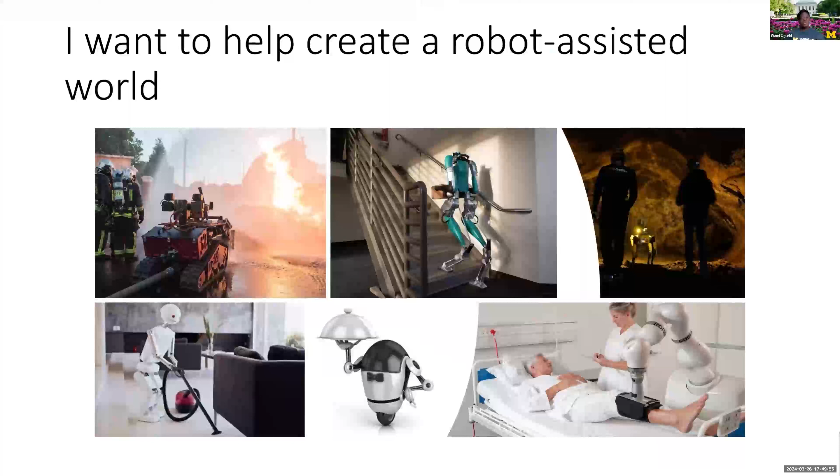But in order for robots to be useful in this human-centric world that's built by bipeds and for bipedal beings, they need to be able to navigate through common human terrain, such as stairs. So the objective of my work is to create a novel stair climbing control algorithm to allow for smooth navigation upstairs. That begs the question though, can't bipedal robots already walk upstairs?

Well, if we look into literature, we see that strides have certainly been made. So, for example, we're all probably familiar with Boston Dynamics and its Atlas robot that's able to navigate upstairs. However, I want to explore underactuated robots.

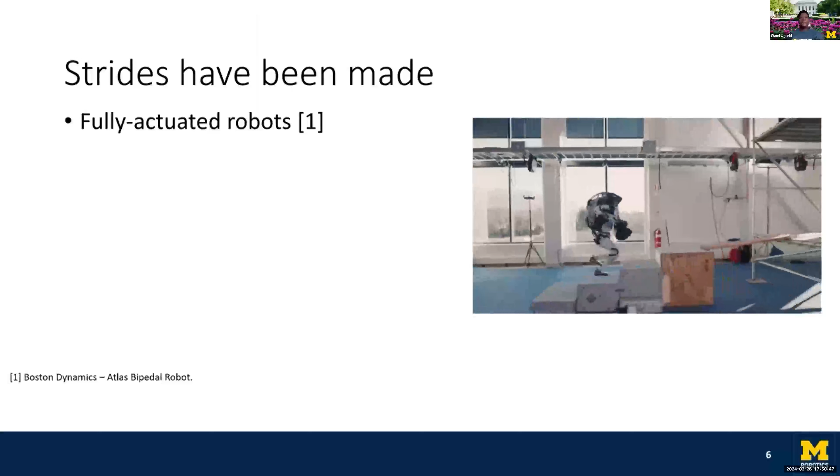Underactuated robots tend to be lighter and more agile. In this work right here, we have the authors use reinforcement learning in order to navigate up and down stairs using an underactuated robot. However, the algorithm treats the stairs as unseen perturbations, and thus quite a lot of torque is having to be exerted in order to make sure that the robot stays upright.

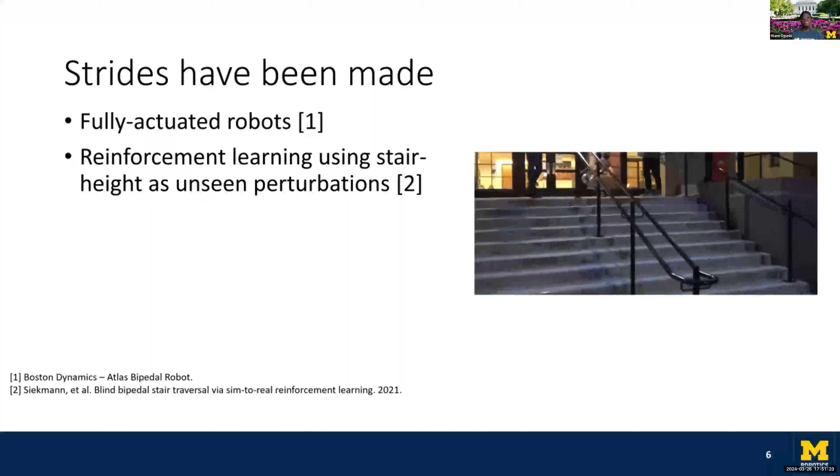You can imagine in delicate situations such as hospital settings, where this is probably not a comforting sight to see, a robot stomping up and down stairs in order to maintain balance. So I want to approach the stair climbing problem in a more gentler way.

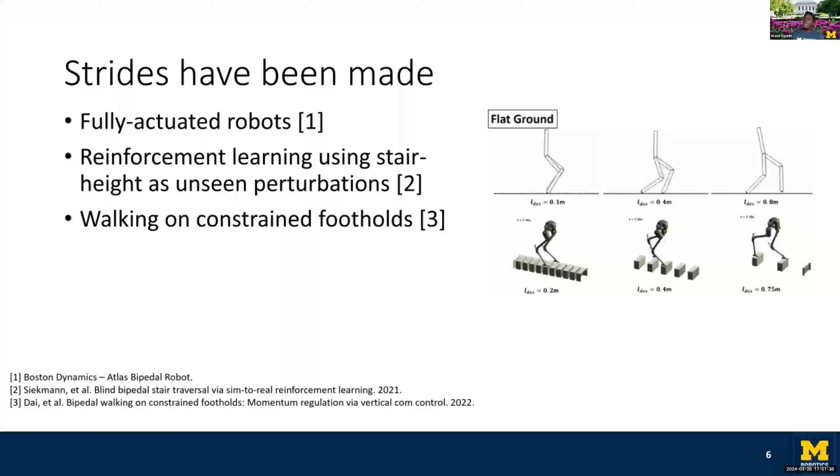And then more recently, this work has come out where the authors were able to get this underactuated robot to navigate on constrained footholds, including on stairs. They approach the stair climbing problem in a different manner than I do in this presentation, which I will be discussing shortly.

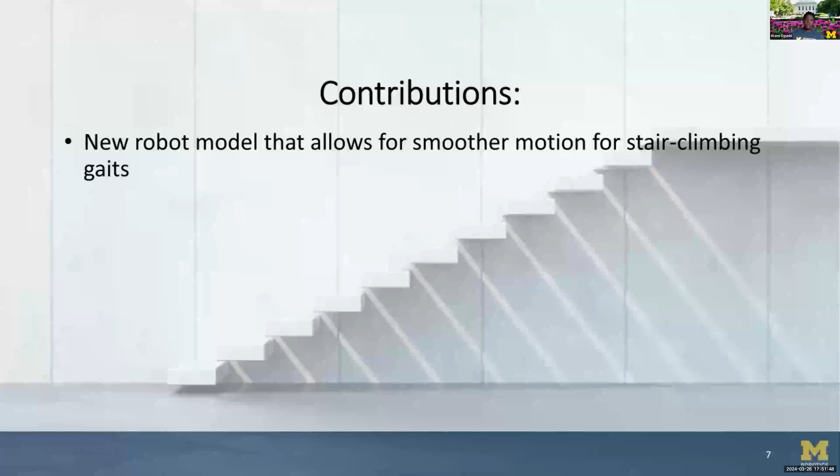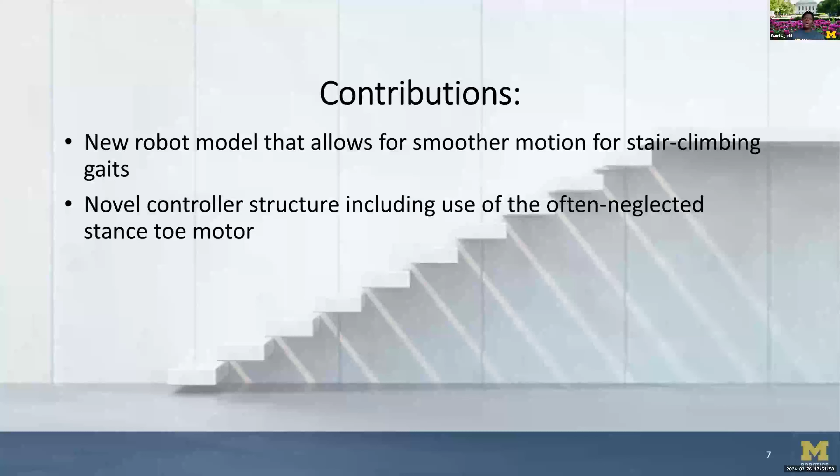So the contributions of my work are as follows. I developed this new robot model that allows for smooth navigation for stair climbing gaits. And I developed a novel control structure that includes the use of this often neglected stance toe motor.

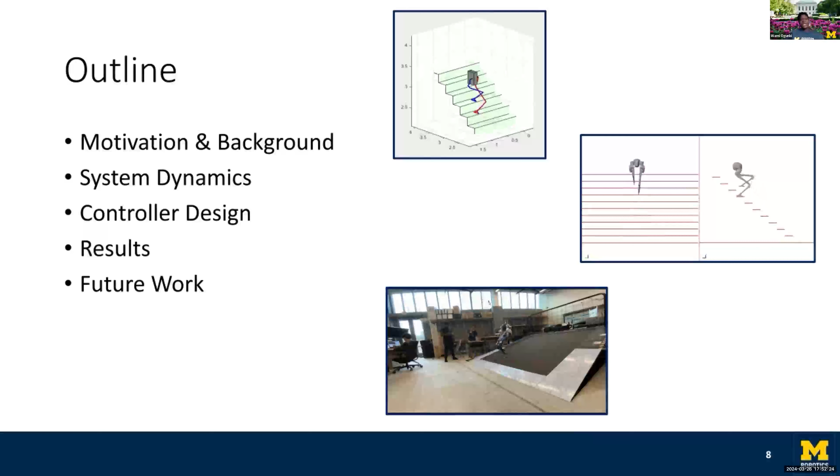So the rest of this presentation is outlined as follows. We already went through the motivation and background. Next, we will be discussing the system dynamics of the robot. We'll then talk about the controller design, as well as get into some results and end on future work.

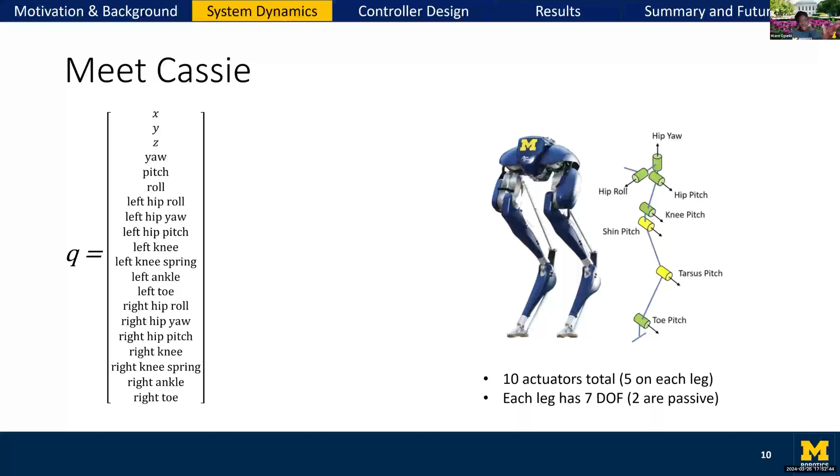So let's meet Cassie. Cassie is the robot that I apply my controller on. Cassie is an underactuated robot, so it has 10 actuators total, 5 on each leg, and each leg has 7 degrees of freedom, where 2 of these degrees of freedom are passive. This represents the generalized coordinate vector of the Cassie robot, where the first 6 coordinates correspond to the floating base coordinates, and these 4 joints correspond to the passive joints.

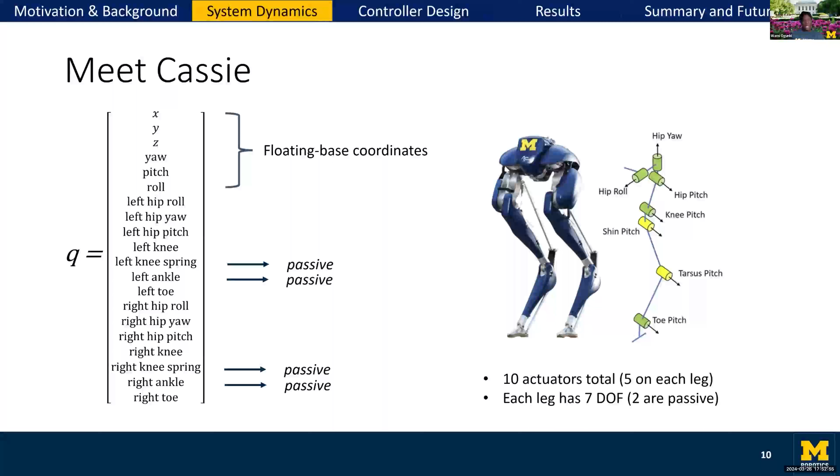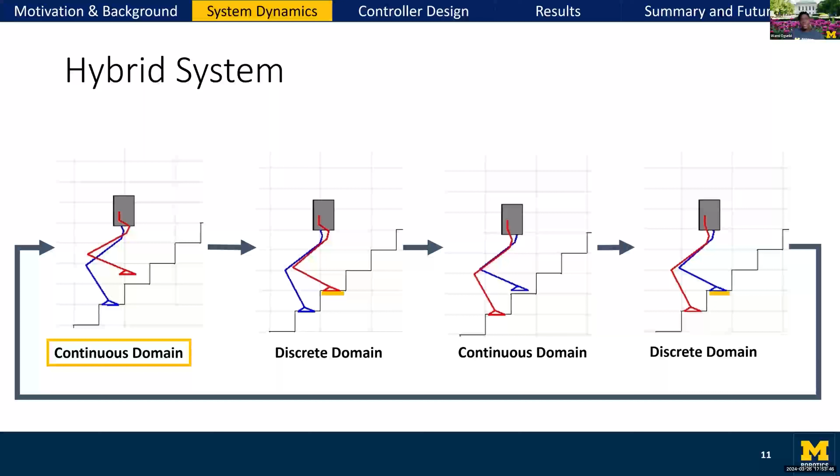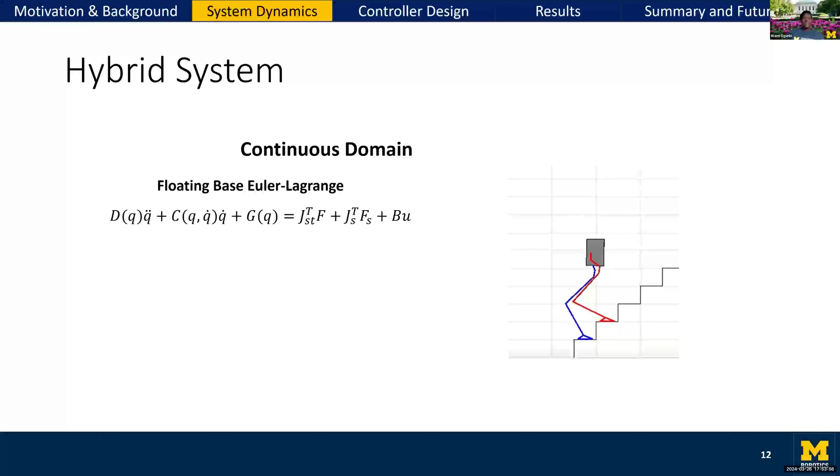We're going to look further into the continuous domain and see what the equations that govern this domain involve. So I used the floating base Euler-Lagrange approach to derive Cassie's robot equations, which we as roboticists are very familiar with this particular representation of the equations of motion.

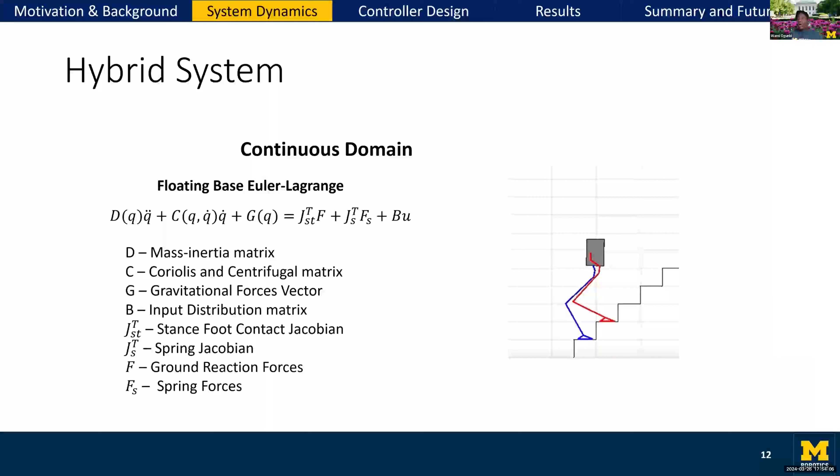But even if you are familiar with this, I don't want you to be fooled by how quote unquote simple this equation looks, because for robots as complicated as Cassie, these equations can be quite complicated. And I want to illustrate that to you.

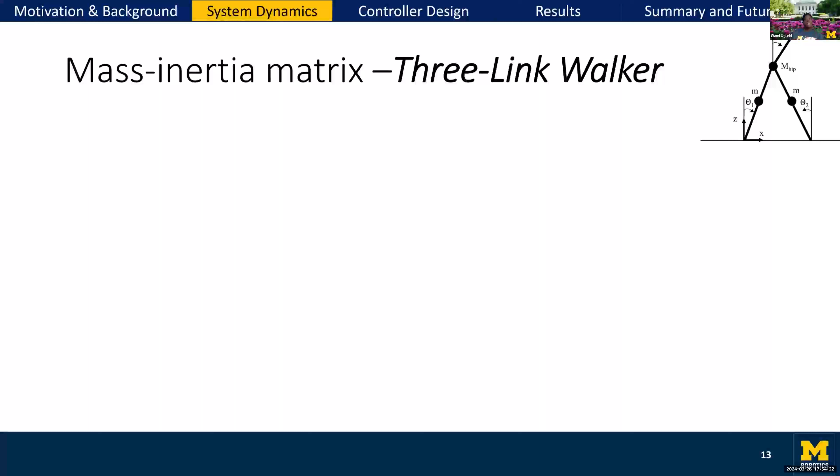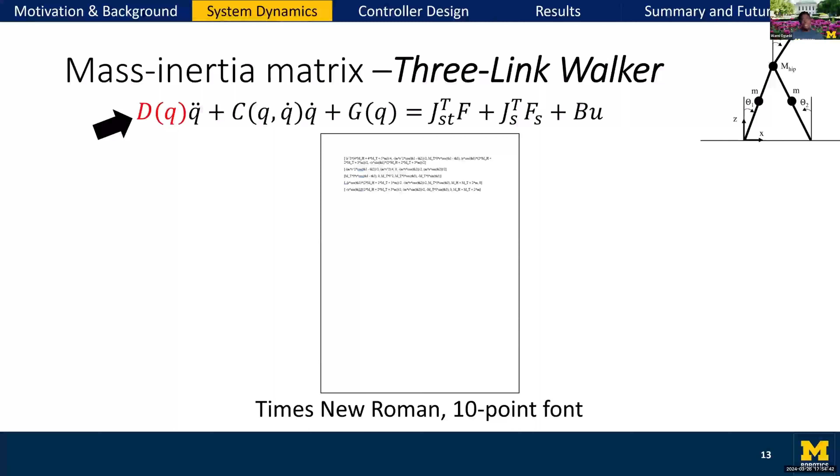So let's look at the mass inertia matrix, which is this D matrix right here, for a simple robot, the 3-link walker, pictured in the upper right-hand corner of your screen. If I were to write out the mass inertia matrix for this robot, it would look like this in Times New Roman 10-point font in Microsoft Word, which is not too bad. You could probably derive this by hand and it not be too bad.

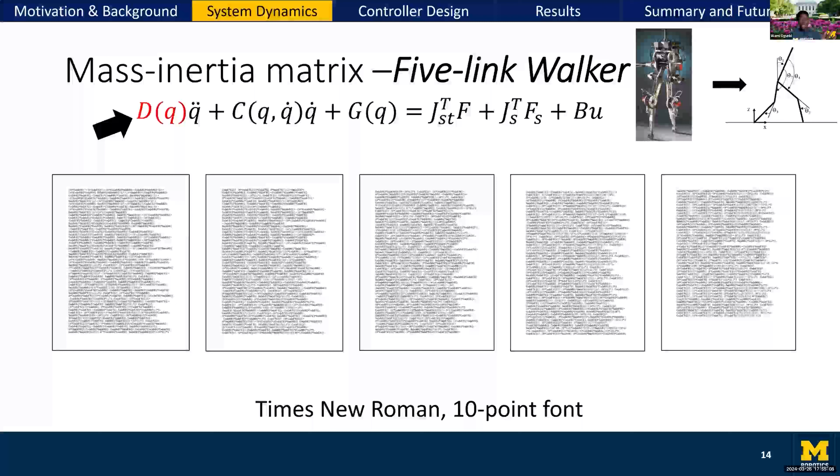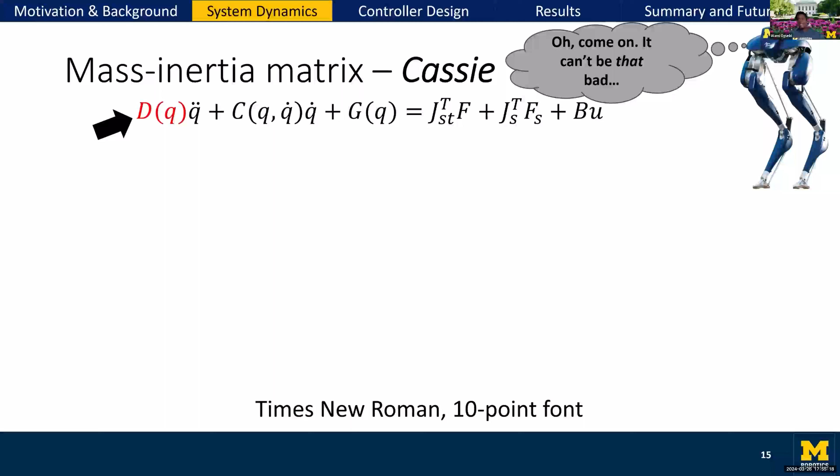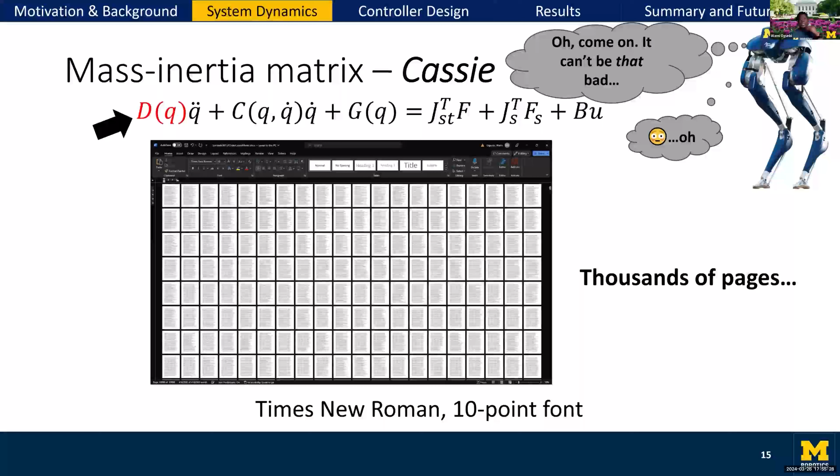Now let's see for the Cassie robot. Can it be that bad? Cassie doesn't think so, but I say it is that bad. In fact, it takes up thousands of pages just to write out Cassie's mass inertia matrix. So all that to say that Cassie is an extremely complicated robot. Again, do not be fooled by how simple these equations of motion look for this continuous domain.

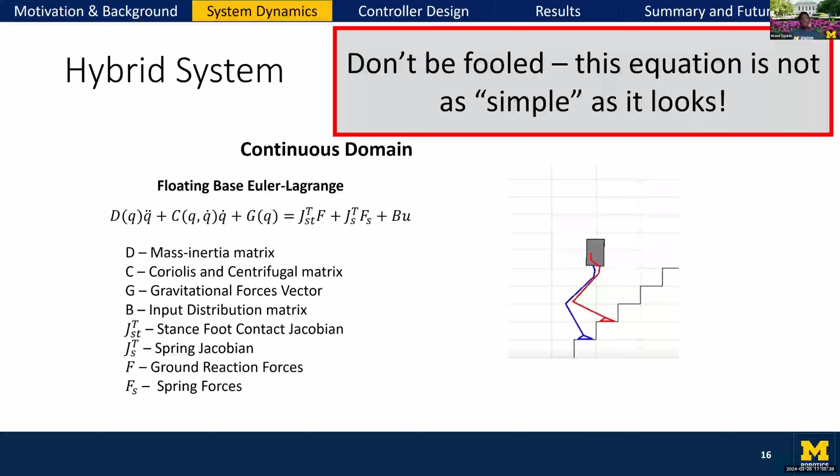So how do I control this extremely complicated robot, and how do I get it to climb upstairs? Let's take a look at my algorithm. Starting with my control design philosophy, we need to regulate 20 degrees of freedom. How do we do that?

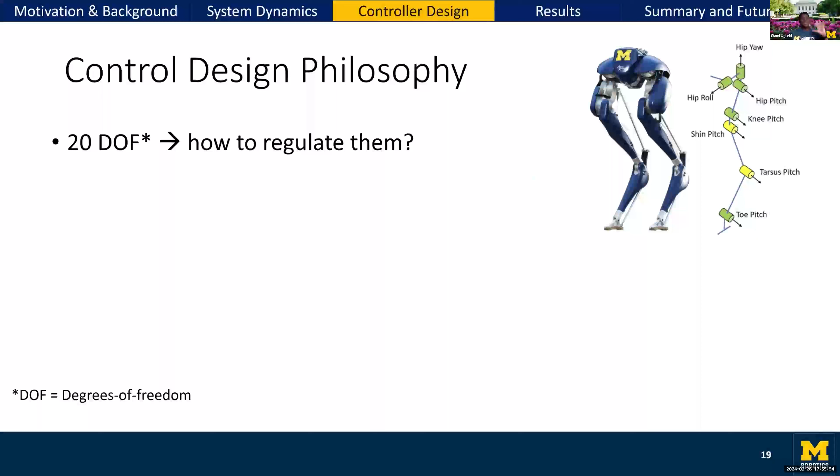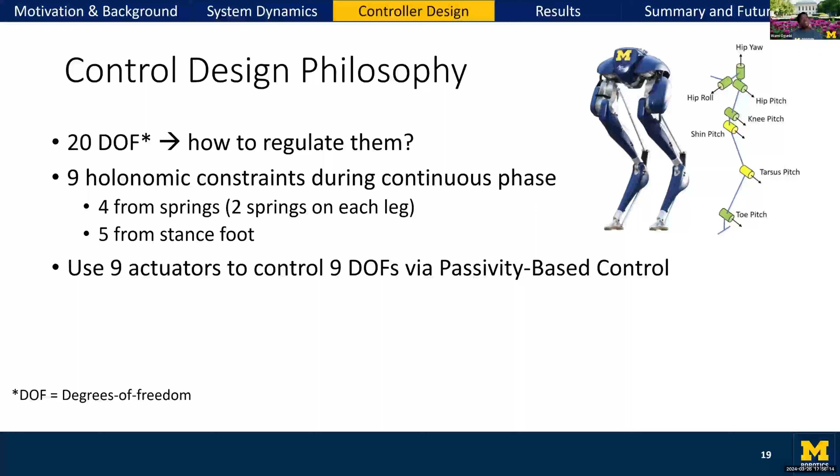So 9 of them are actually already taken care of due to the holonomic constraints during continuous phase. Specifically, there's 4 coming from Cassie's springs, and there's 5 coming from the stance foot. I'm then going to choose to use 9 of Cassie's 10 actuators to control 9 degrees of freedom via passivity-based control. And then I'll use that 10th actuator, which is the stance toe actuator, to control the sagittal plane center of mass dynamics. And here I want to point out, this is one of the innovations of this work, because previous methods would use foot placement to control this particular plane of motion, but I'm using the stance toe actuator.

The reason for this is because think of the geometry of stairs. There's typically limited space for you to move in that sagittal plane, so foot placement in that particular plane of motion does not make sense. Hence why I use the stance toe actuator.

And now for that final degree of freedom, I'll use lateral foot placement to control the frontal plane center of mass dynamics. Now you might be thinking, wait, why are you using foot placement in this plane of motion, whereas you didn't or couldn't use it in the sagittal plane? Well, again, I would invite you to think about the geometry of stairs. Stairs are typically pretty wide, so using foot placement in that particular plane of motion still makes complete sense.

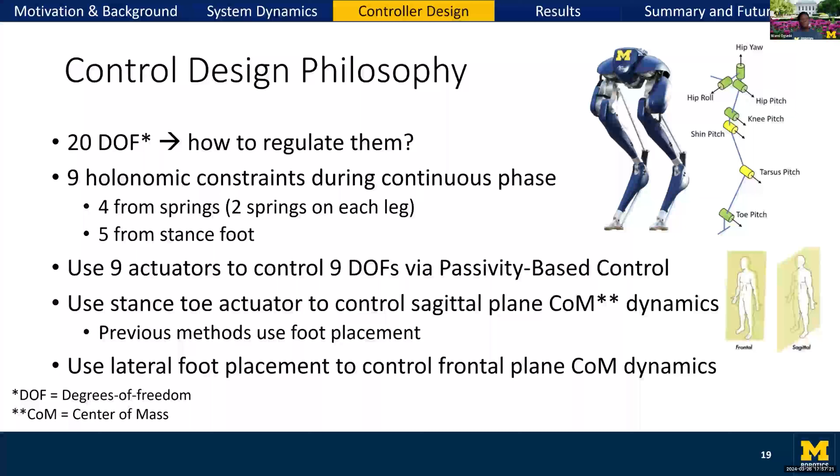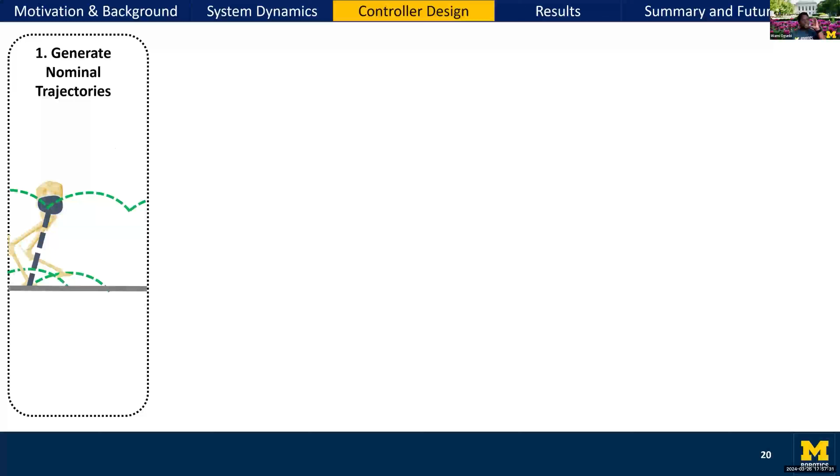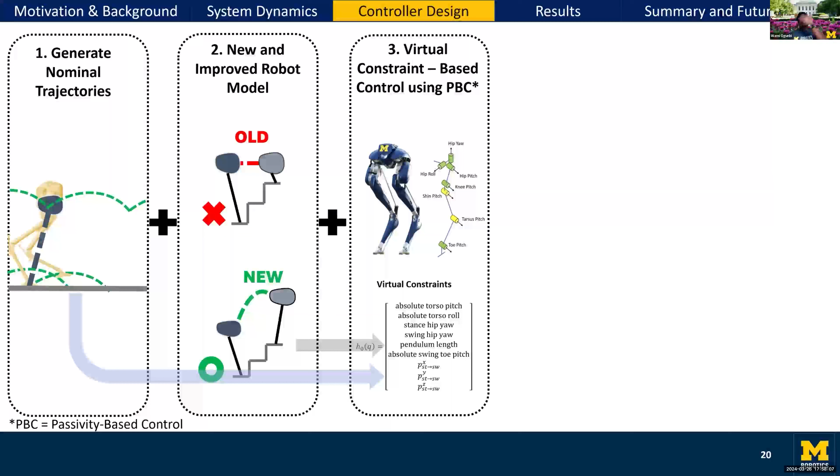And then I want to point out here that the desired trajectories that we follow in the virtual constraint-based control use the trajectories that we generated in the first step. Additionally, the new model that I developed is also being incorporated in this particular step. Then we have this intelligent ankle torque computation plus lateral foot placement strategy. Again, I use the nominal trajectories from that first step in this part of the controller, as well as that new robot model being incorporated here as well.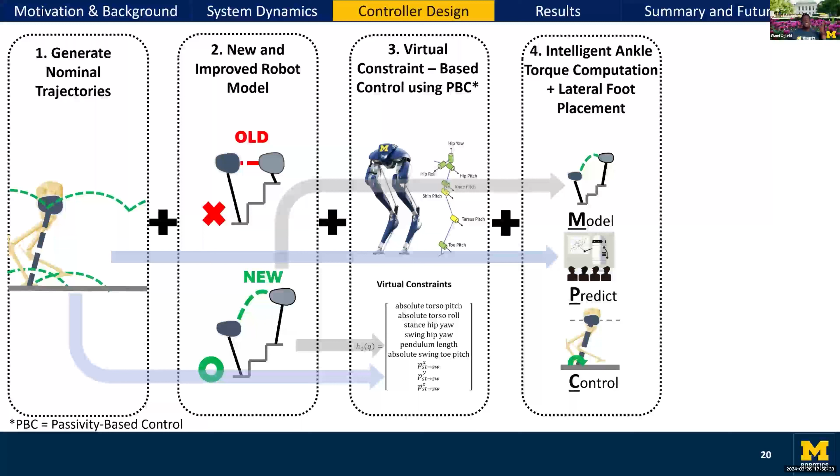And all of this taken together results in stair climbing. We're not going to have time to go through each of these particular segments, but I'm happy, of course, to answer questions about these if you are curious. So for now, we'll just look at this new and improved robot model that I developed. But before we can talk about the new and improved robot model, we need to know where we came from. What was the old model?

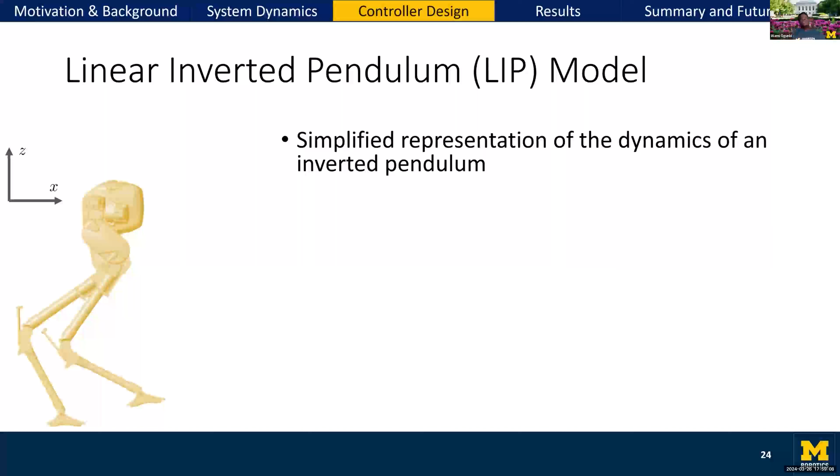We used to use what's called the linear inverted pendulum model, or LIP model, which is a simplified representation of the dynamics of an inverted pendulum. For bipedal robot applications, we would use the LIP model by basically assuming a point mass on massless legs.

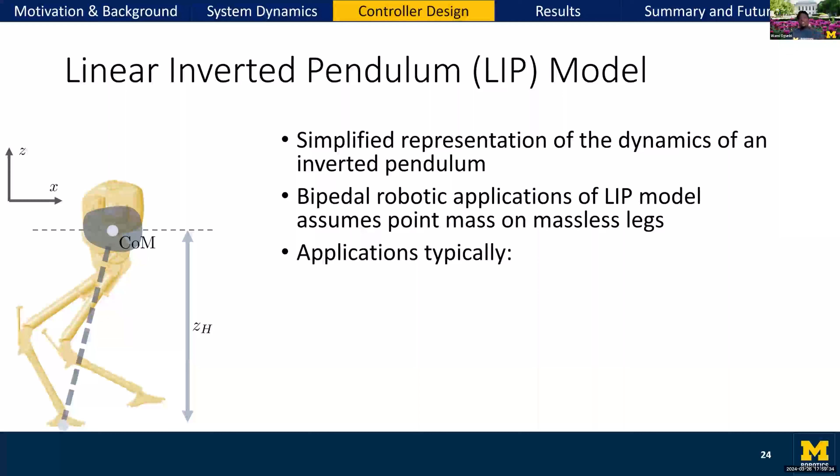Direct your attention to the image of the CASSIE robot in the bottom left-hand corner of the screen. If I were to write this using the LIP model to represent this robot, it would look exactly like this. Assumptions or applications of the LIP model would typically assume constant center of mass height, and it would use center of mass velocity to quantify what we call balance.

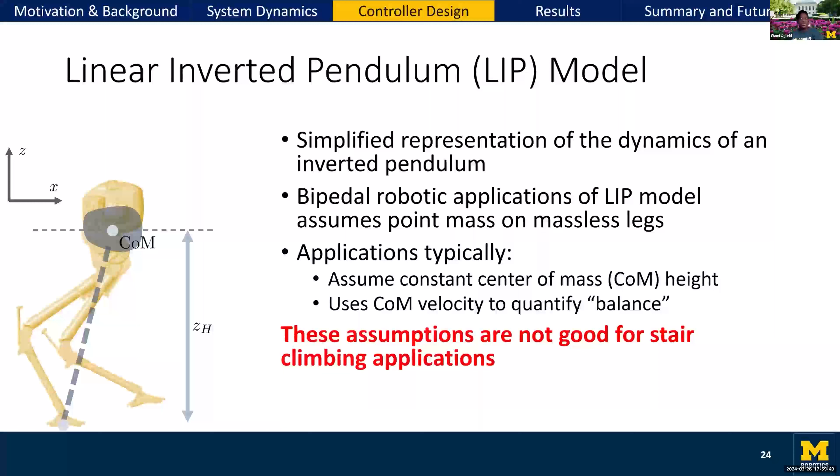And what we'll see is that these assumptions are not good for stair climbing applications. So now we upgrade that LIP model and use the ALIP model, the Angular Momentum Linear Inverted Pendulum model. As the name implies, the ALIP model is another derivation from the LIP model, but instead of using center of mass velocity as the key variable, we use angular momentum instead.

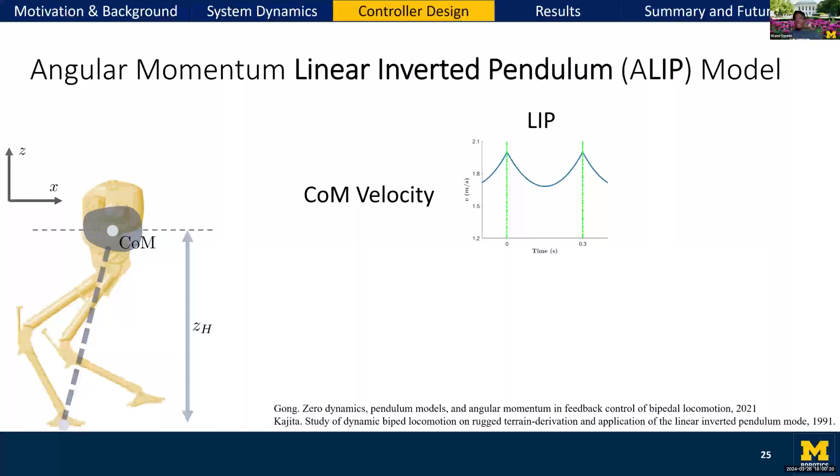Why this change? Let me show you how center of mass velocity evolves over time for the LIP model. It looks like this on this graph. Now if we compare this to the full order model of CASSIE, the center of mass velocity would look like this. As you can see, there are discontinuities in the CASSIE model that you don't see in the LIP model, which is not good.

The reason why we use reduced order models like the LIP model is so that it can be a fair representation of the full order model of the robot we're trying to represent. But as you can see, these two graphs look completely different — the LIP model is not acting as a fair representation for the CASSIE model.

So now let's look at how angular momentum evolves about the contact point. For the LIP model, it looks like this. And now for the full order model of CASSIE, it looks like this. Now you don't see these discontinuities that appeared in the previous graph.

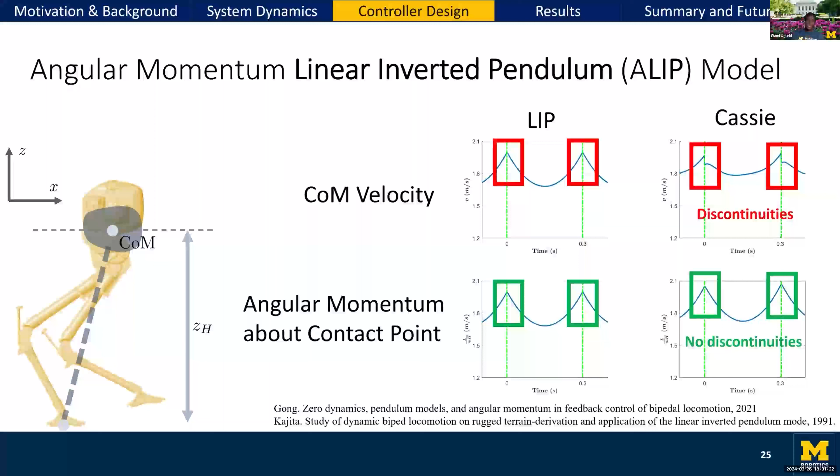In fact, we see now that the ALIP model functioned as a better representation for the full order model of CASSIE.

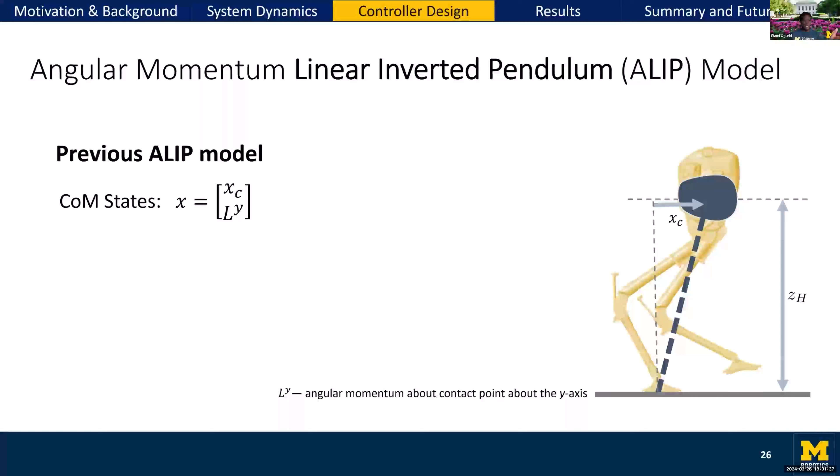So with the ALIP model, I actually take it one step further in my research. Previous applications of the ALIP model would define the center of mass states like this, and then find the full order center of mass dynamics like this, where the LYC term is actually proven to be negligible for CASSIE-like robots. And here, this is where things get interesting.

We know for CASSIE-like robots, this LYC term is still negligible, that hasn't changed. But now, instead of a constant center of mass height assumption, I make a small angle approximation and say that theta C is sufficiently small enough that sine theta C is approximately equal to theta C.

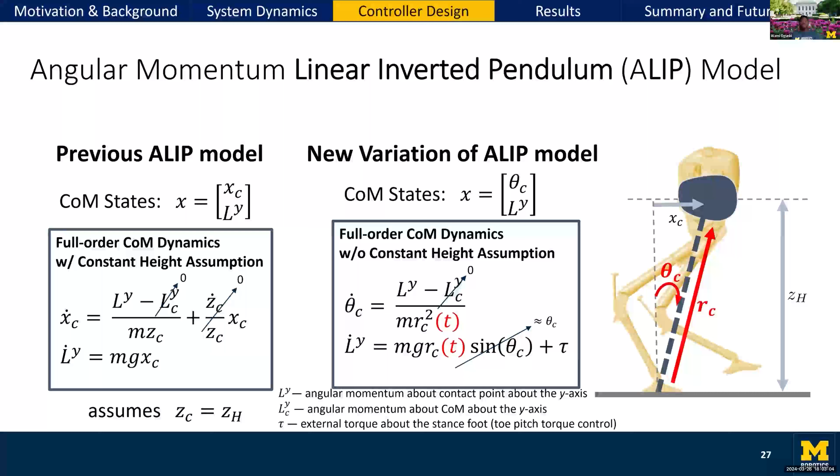To really drive this point home, this r_c term, this pendulum length term, which acts as a proxy variable to center of mass height, is time-varying, unlike in that previous version of the ALIP model. So that's the new and improved robot model that I introduce in this work.

We don't have time to go through each of these other areas of this controller that I implement, but happy to answer questions about those later on if you have them.

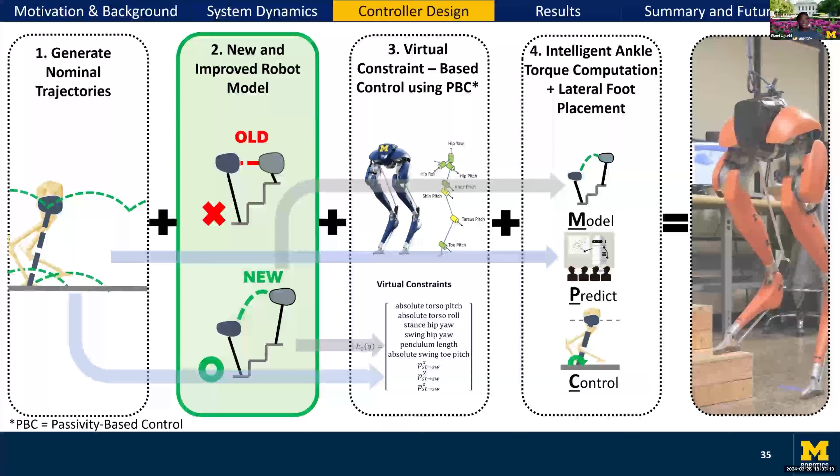So let's look at my results, starting first with the SimMechanics simulation. A quick note about this environment.

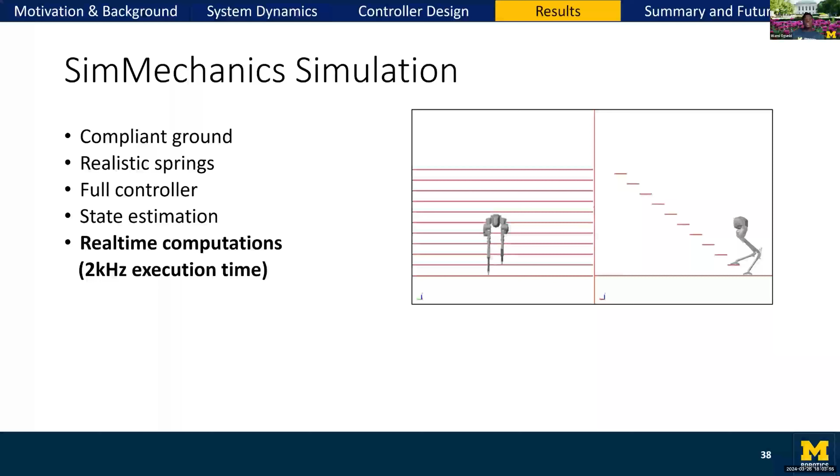We do incorporate compliant ground, we factor in Cassie springs, and we're implementing the full controller as we would on the actual hardware of the robot. State estimation is being used exactly as we would use on hardware, and all the computations are happening in real time, running at a 2 kilohertz execution rate, which is extremely fast.

All that to say, this is a very rigorous simulation environment, which is why we love to use it in my lab, because controllers that work in SimMechanics tend to also work on hardware.

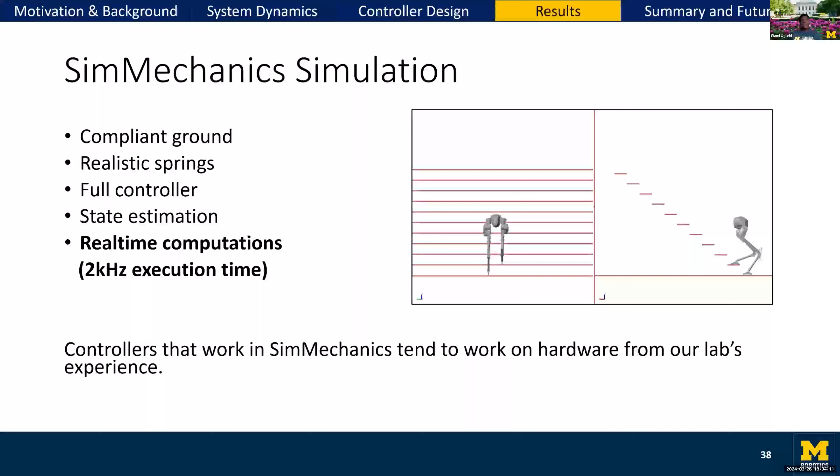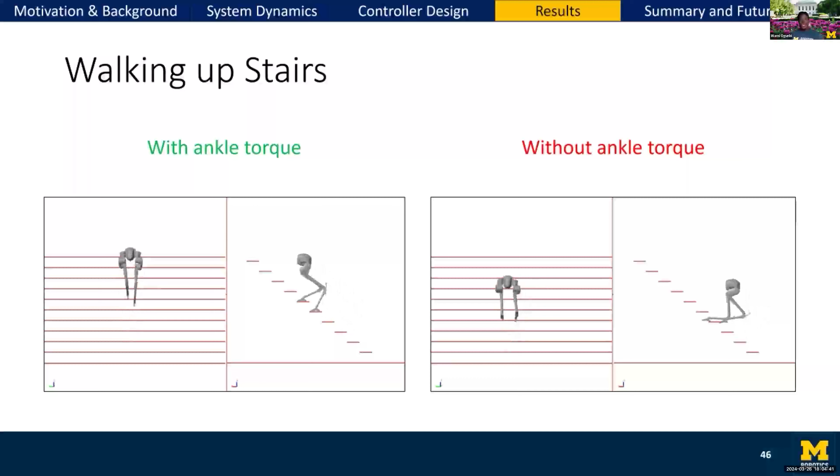So when I apply this controller in this environment, we see that Cassie is able to navigate all the way up the stairs, specifically when that ankle torque is being engaged. Just to test it out, we turned off ankle torque, and we see that Cassie is only able to make it a couple of stairs before it falls on its back. Something interesting here is that the magnitude of the ankle torque is actually pretty small, and yet this little bit of ankle torque is the difference between whether Cassie can make it all the way upstairs or fall back on its back.

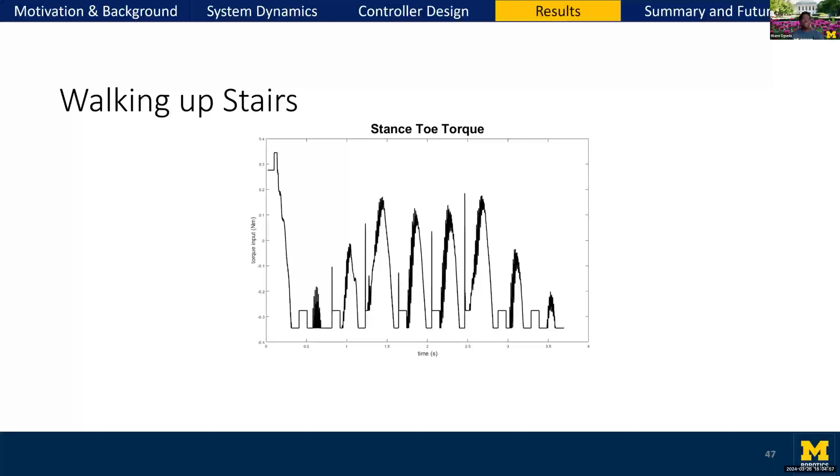Now we want to try hardware, and Cassie being a very old robot that is no longer under warranty, we want to be very careful and intentional on how we test our controller. So we take incremental steps before going all the way to testing really dangerous experiments.

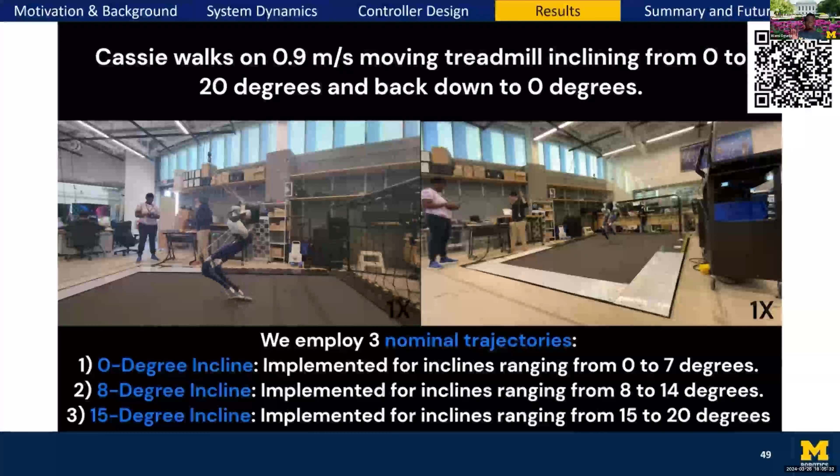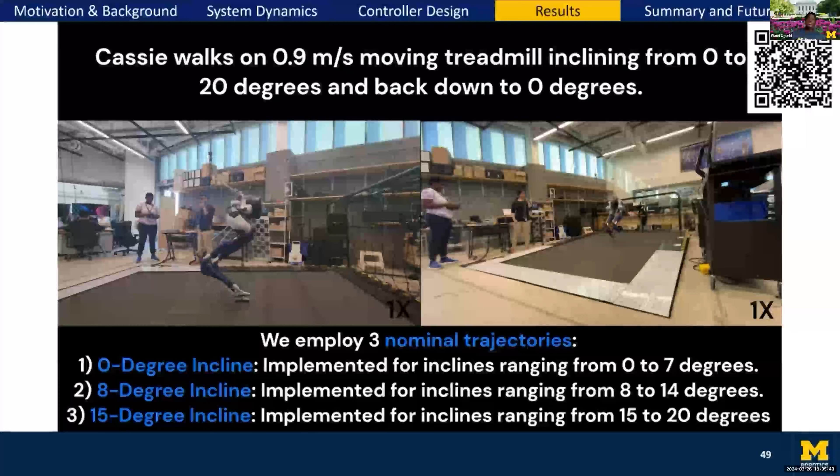The first thing we do is have Cassie walking on a treadmill going at 0.9 meters per second. This treadmill slowly inclines from 0 degrees all the way up to its maximum incline of 20 degrees and then back down to 0 degrees. We're not going to have time to play this entire video, but the QR code to see it is on the top right-hand corner of the screen. It will stay there for the next few slides, so you're welcome to access all my experiments using that QR code.

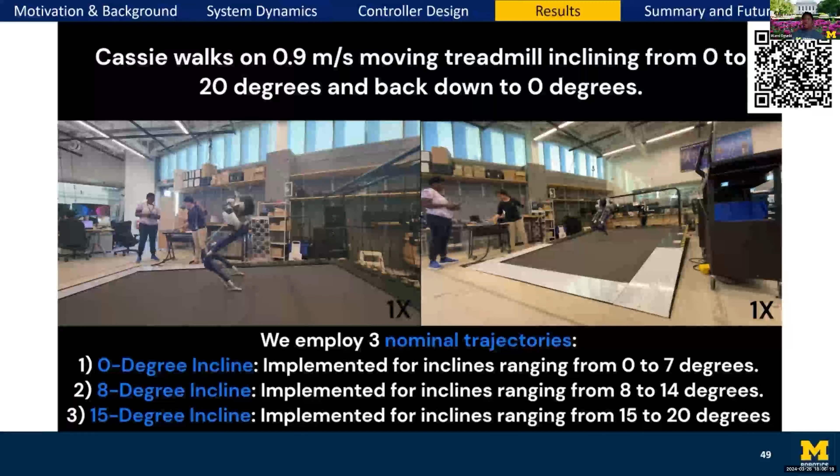What I want to highlight for this experiment is that we only use three nominal trajectories when implementing it. This tells us that we don't need a nominal trajectory for every single specific circumstance we're trying to test under. One nominal trajectory is good enough to be applied on a wide range of applications, so this just shows the robustness of the controller.

In this experiment, we have Cassie walking from stationary flat ground to a treadmill that's inclined at 20 degrees and also moving. Think about trying to walk on a treadmill that's inclined and moving - that's difficult even for us humans, so you can imagine how difficult it is for a robot to accomplish. This again shows the robustness of the controller.

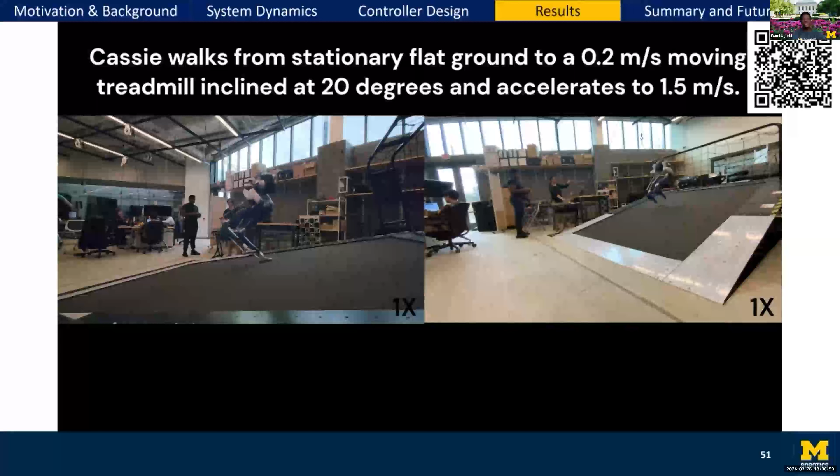When we get Cassie onto that treadmill, we have it start to increase its speed to 1.5 meters per second, and you can see that the controller is still functioning just fine.

In addition to stairs, there's also moving walkways that we encounter in real life - you might see these in airports or some fancy malls. The speeds of these moving walkways would typically be from about 0.5 to about 0.8 meters per second. So we get Cassie to try to walk on this moving walkway that's moving at 0.8 meters per second, which is that upper speed.

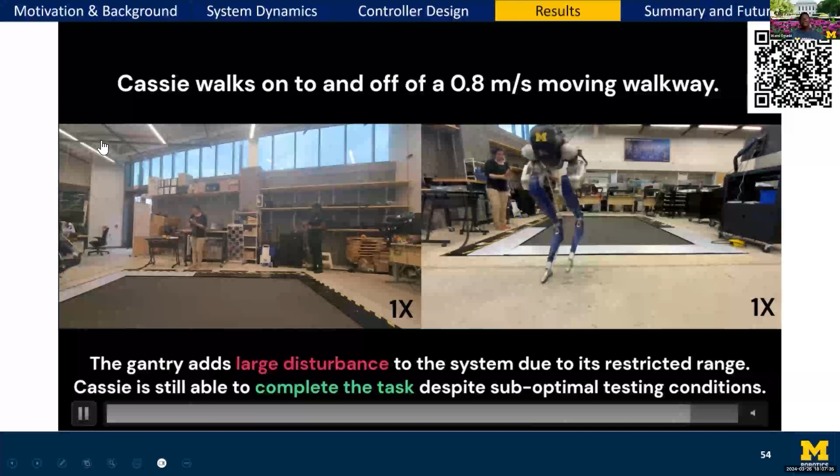Something I want to point out is that the gantry, which is this thing that would catch Cassie if it were to fall, is acting as a very large disturbance because the gantry is not designed to move as far back as we needed Cassie to start in this experiment. So while Cassie is trying to walk, this gantry is kind of tugging at it, and yet the controller is robust enough to overcome that large disturbance and complete the experiment.

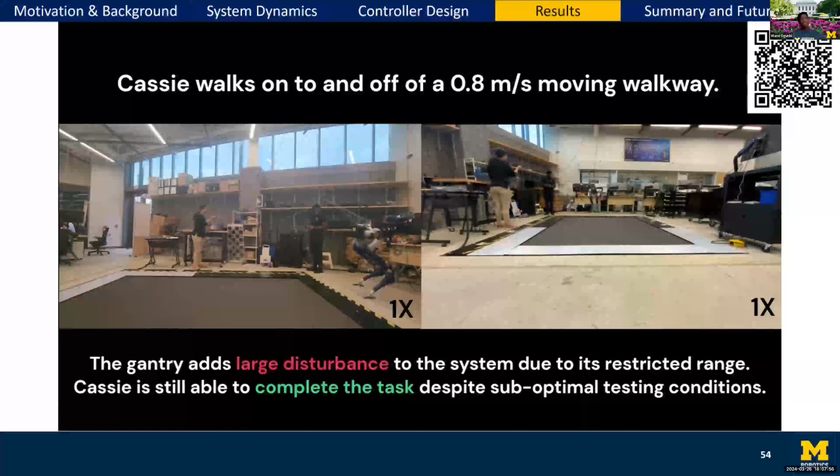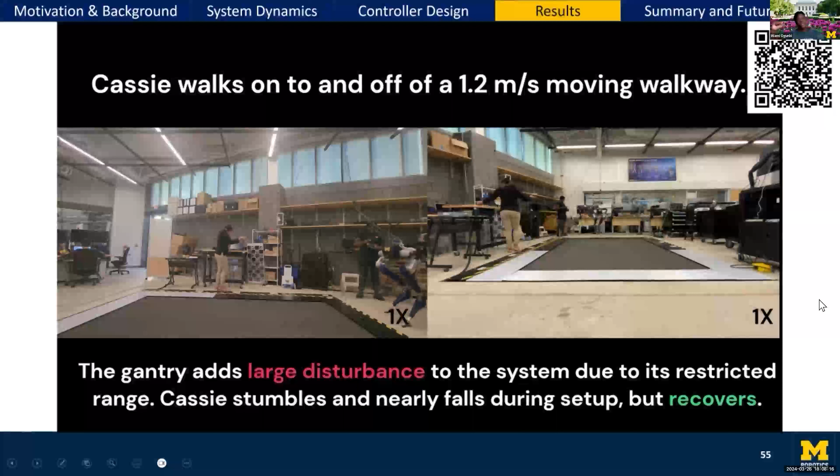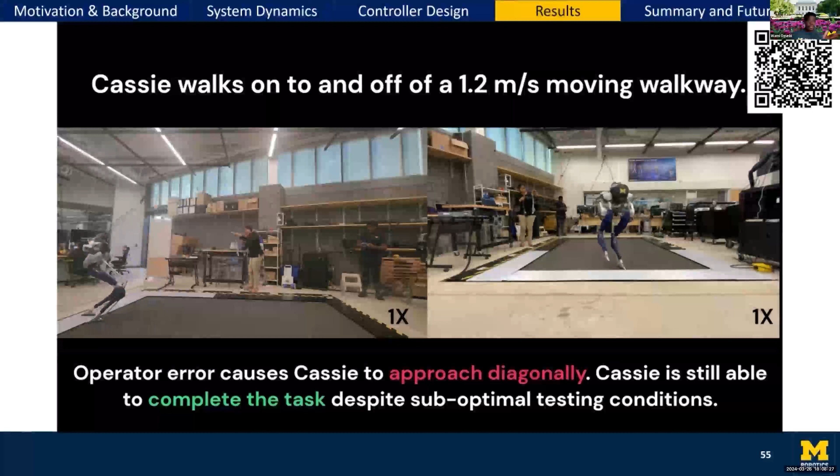We also have Cassie move on a walkway at 1.2 meters per second, which is faster than what you'd see in real life. In this experiment, you're going to see that Cassie is about to stumble in a couple of seconds - and yes, Cassie stumbles. Again, this is due to that gantry acting as a very large disturbance. Yet the controller is not only able to recover from that stumble, but also still able to walk across this very fast moving walkway, faster than you would see in real life, and complete the experiment.

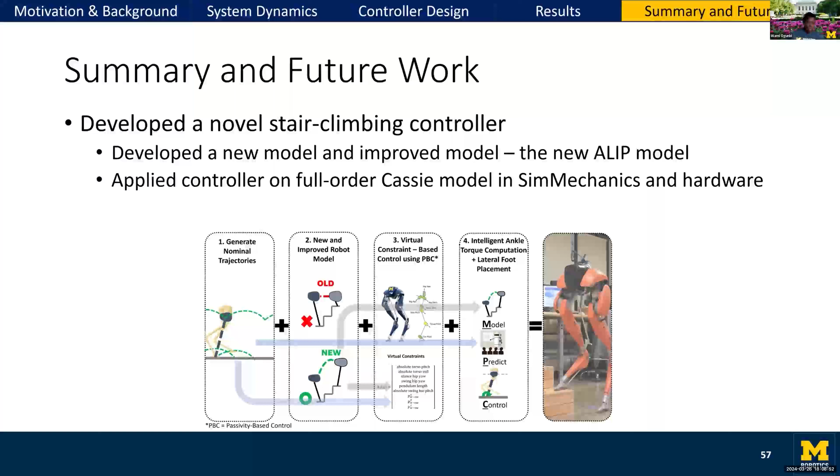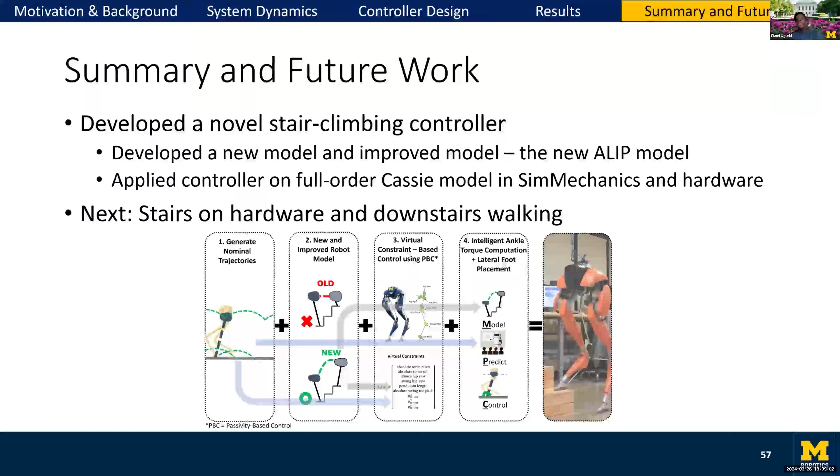In this presentation, I talked about this new novel stair climb controller that I developed. We specifically covered the new and improved robot model, the new ALIP model. There are other parts of this controller we didn't get to today, but I'm happy to talk about them in the Q&A. We're able to apply this controller on a full order model of Cassie in both a SimMechanics simulation environment and on hardware. The next steps would be to apply this controller on hardware on stairs, as well as to explore downstairs walking.

With that, I would like to thank you for your kind attention. I have QR codes linked to the videos, as well as to my website, on the screen.